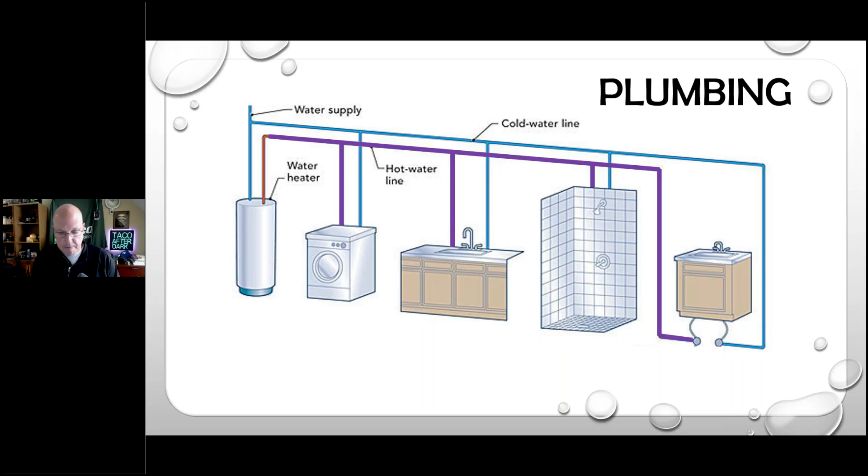So we lose that water. So now we have to dump all this water out of the line in order to get the water warm again at our fixtures. So that's our biggest problem: that water cooling down, and now we need to get that hot water again. And when we take a look at really what we're trying to do, I think this is so important to pay attention to when we start looking at the definition of what domestic hot water recirc systems are.

Now, I hate reading from slides, because I know everybody here that is joining online with us today can read. But I want to read it just so you can really pick up a few of the things that we're talking about today.

A hot water recirculation system is a plumbing system that replaces hot water to the fixtures without draining and wasting that water. Recirculating systems mechanically move temperature. Remember that, temperature from a water heater to the fixtures themselves. So it has absolutely nothing to do with the gallons per minute that your fixtures can actually flow. We are just looking to replace the hot water, the temperature that was in those pipes, with warm water from behind it again.

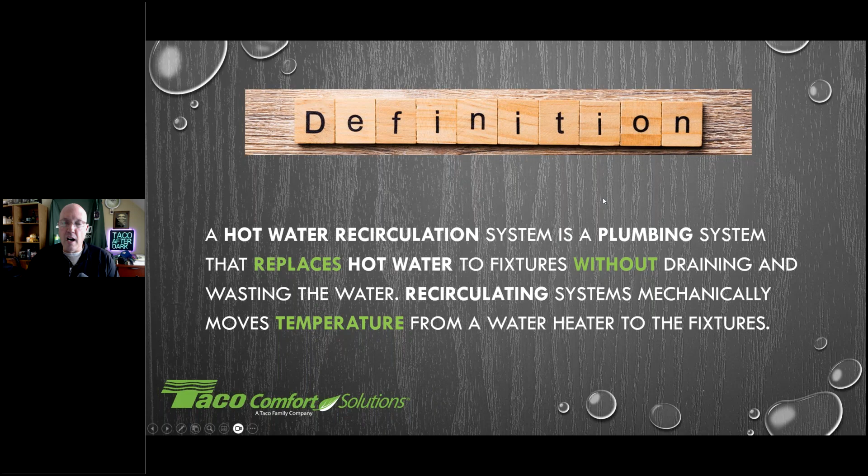So it's not going to be a very large flow rate. And that's going to come in really important in the next session when we go into sizing our circulators. So we'll spend a lot of time on that next week, making sure that we have the right size system installed for that application, for that project, for that house. So just remember that. It's not GPM, it's all about temperature that we're trying to move here.

So when we start thinking about hot water recirculation, many homes, many years ago, did not need a lot of hot water recirculation. But construction of homes has changed a lot over the last 50 years. When we take a look at what's changed, and why hot water recirc is more important today than it ever has been. And again, most people don't even know that there's a way to eliminate that wait for hot water. As we look at history over the last 50 years, the average home size has doubled.

You think about that home in 1970, a less than 1,500 square foot house. Today's homes are almost 3,000 square feet. And also think about how many people lived in that 1970s ranch. There were probably 5, 6 people in that house. There was no time for the water to ever cool down, because how many bathrooms were in there? There was one. So you end up with a lot more usage. The water never had a chance to cool down. Today's home, 2,800 square feet. And think about how many people are in that house today.

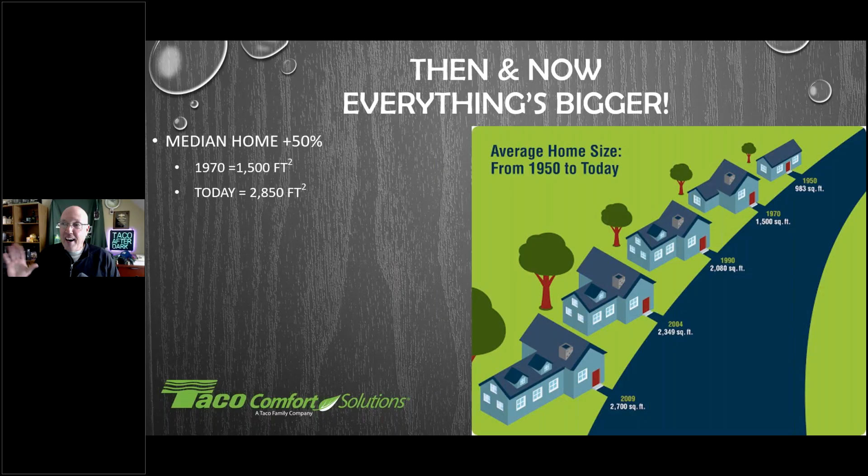All right, we end up seeing 3, maybe 4. All right, we're not going to have more kids than parents today. Okay, so the size of the home has changed. And therefore, with the size of the home that's changed, the distance to those furthest fixtures has also increased.

We're looking at that home maximum was like 30 feet. That ranch home that we saw in the 70s was a stack system. You had that water heater, and right above that water heater in the basement space was the kitchen. And the kitchen shared a wall with the 1 bathroom in the house. That was it. That was the amount of run-out pipe that you had.

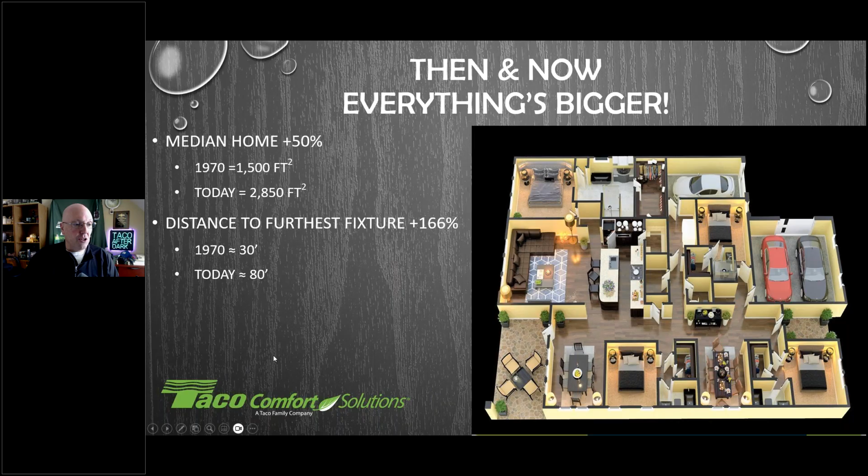Okay, now we're looking at 80, 90 feet to that furthest fixture. We're putting fixtures wherever we want to in this house. Nowadays we're looking to use hot water wherever we want to use it. And then of course, we also see the number of fixtures doubling out there. Every place we're putting it into a fixture group, we're doubling up those numbers.

For example, I renovated my house about 10 years ago, renovated to studs, new electric, new plumbing, new heat, new insulation, new everything. And as I was running that new outdoor spigot to the front yard, right by the driveway, mostly for washing cars and whatnot, I pulled out that spigot and I put in a hot cold valve for outside of the driveway, just for the capability of being able to wash my car in November and dunk my hand into warm water.

Now, granted, it was 10 years ago. I still haven't turned on the hot valve from inside the house to use hot water out in the front yard. Actually, I did. I had it on the first year. We had all this construction out there, and somebody decided to water the flowers that I had just planted and didn't realize they had turned on the hot side of the spigot, and everything was dead within minutes. So I did turn it off at that point, but I have that capability to have it there, right? So our number of fixtures have doubled.

So what does all that mean? Well, when you do the math, it's going to calculate out what we're doing and waiting for hot water. So the higher the fixture count, the more volume of water, which means we need to have bigger pipe to supply our house.

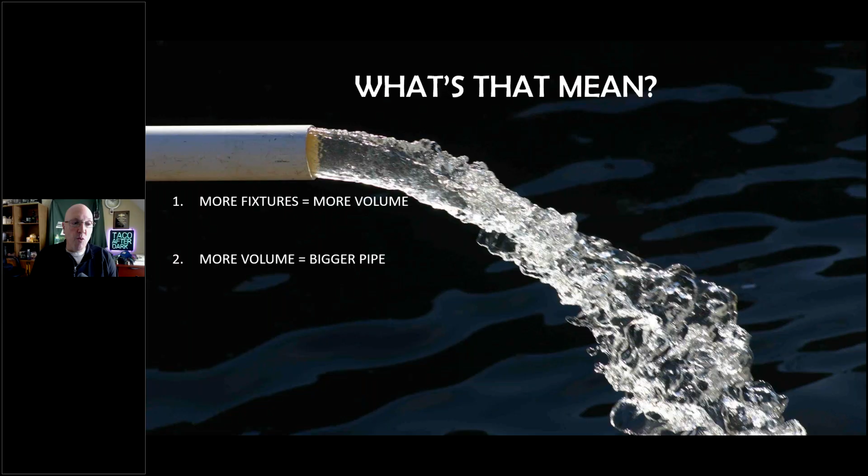You take a look at that old ranch house from 1970, we had 1/2 inch coming off of that water heater. Today, 3/4 and 1 inch is the norm coming off the water heater. And then as we do that tee and branch system throughout the house, we'll neck down to the smaller pipe size as we get further away. But that 3/4 and 1 inch is more common.

And then, with that bigger pipe, the fixture flow rates have dropped. We've had mandates come along with your fixtures; the flow rates coming out of your shower heads have changed. Look at the flow rate of a shower head today. You go put a new shower head in your house, you're looking at 2.5, 2.25 gallons, 2 gallons a minute. And even less is coming down the pike.

You take a look at that shower head from 1960, 1970. We're looking at 5, 6 gallons a minute. You turn the shower on, it took skin away. But now we have regulated fixtures dropping that flow rate down tremendously. So when that flow rate drops, the velocity of the water drops tremendously as well.

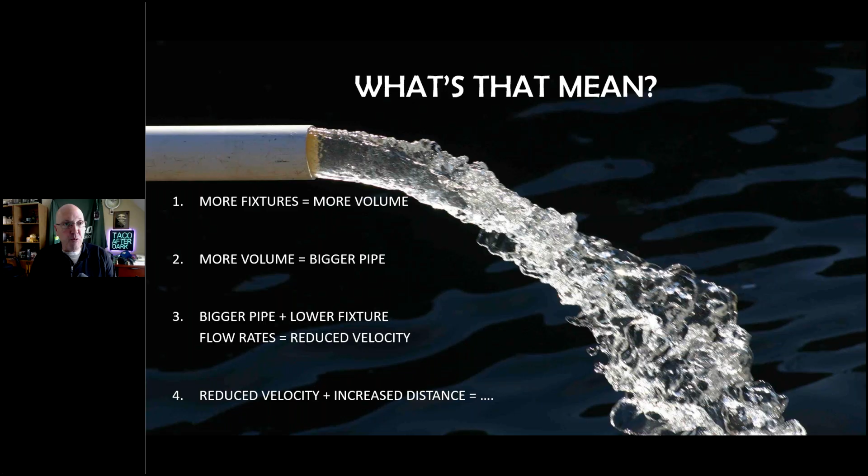So when you reduce the velocity and increase the distance out to that furthest fixture, when you do the math, people wait 18 times longer today for hot water than they did in 1970. 18 times longer. And what do they do about it? Absolutely nothing. It's just a given. Hey, this is what we have. For some people, it was a light switch moving from that 1,500 square foot ranch into a 3,000 square foot home.

And they say, well, the house is bigger. I have to wait for water longer, right? And that's it. They don't know there's anything that can be done. So waiting is one of the biggest downfalls to waiting for that hot water to get there. But then we start talking about the wasting.

All right. So if you wait for hot water, I got a quick question for everybody out there. If you can tell me, how long do you wait for hot water in the morning? How long do you wait? I'm just curious as to a general. We've got a ton of people online with us today. I would love to have a couple of answers out there on how long do you wait for hot water.

So Peter says he waits about 2 seconds. All right, so either he's got that 1970s ranch still, or he's got a recirc system installed in his house. You can always tell the quick ones. They got a recirc and they want you to know about it. Right. Tom here saying he waits 3 to 5 minutes. Yeah, Ahmad, 3 minutes roughly. Wow. Yeah. 5 minutes for Wanda.

That's crazy. All right. Now, what's interesting is that you're estimating that time period, but you'd have to stand there with a stopwatch and put your hand in the shower and wait for it. If you know you wait for hot water, what's your typical routine? You turn the water on and you go do something else. Right? And then you take a look back, and once you see the steam, you're like, okay, time I can jump in now.

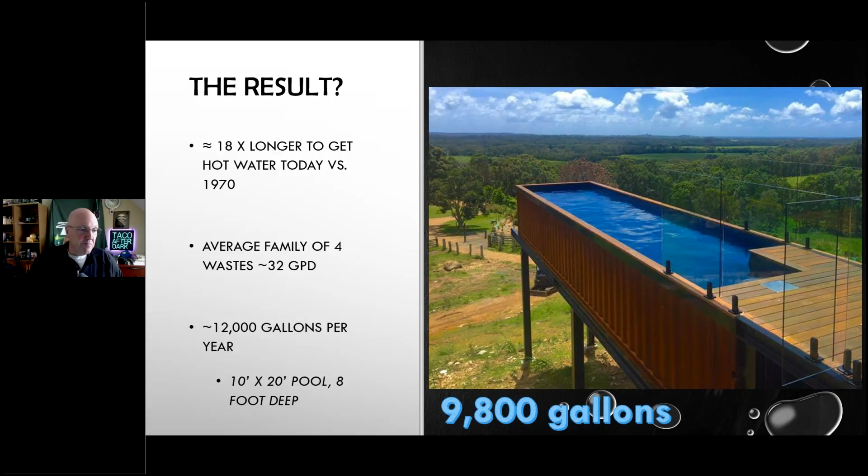However, we're on a septic system here, so I don't have to pay for it leaving my house. You travel 25 miles west of me and start getting closer to New York City and get into the 5 boroughs, well, you pay for water coming in once and you pay for it twice going out of your house. So then all of a sudden it starts to make a big deal. So anyways, just things to pay attention to.

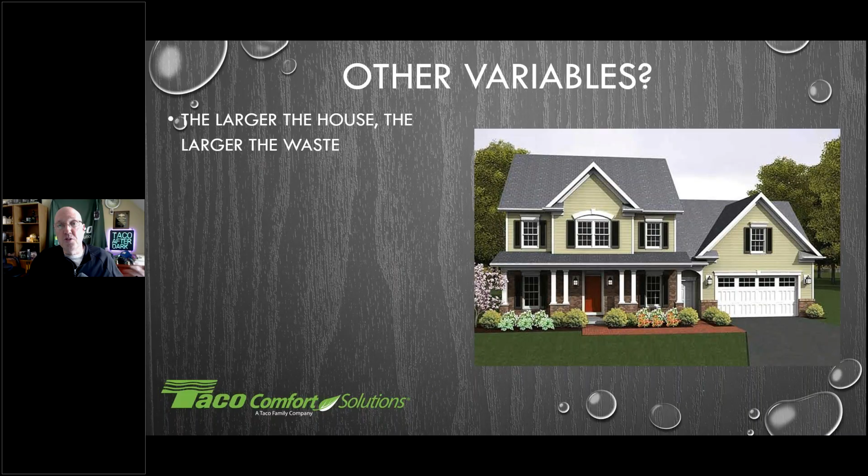Other variables that we're going to see out there when it comes to hot water recirculation and wasting that water. Obviously, the larger the house, the larger the waste is going to be. So you go from the smaller house to the much larger home here. But also think about your neighbors. Think about the immediate 10 houses around you. And if you all have the similar size home, all of a sudden we're looking at 120,000 gallons for your first 10 neighbors. That becomes an interesting number, right?

And now think about your neighborhood. Let's say your neighborhood's around 100 homes. 1.2 million gallons wasted while waiting for hot water. I don't know if we have any builders in here that are building neighborhoods. Well, this becomes a big deal to you on understanding where you have to put that water and how to get that water away from the home. Sometimes you might be able to build homes at a little closer density because you're eliminating the waste of 1.2 million gallons by adding a hot water recirc system to people's homes. So very interesting things to think about.

I've been seeing a whole bunch of things moving here on the screen. JB, do we have any questions or comments? Yeah, we got an interesting comment from Matthew Hermanson, who says he consulted with a fellow contractor in Southern California a while back. He installed a new tankless on a recirc system, lines underground to the master bath. It took 15 minutes for the hot water before the recirc. Now the electric bill went to $1,800 a month. He did the math. Everything was fine because they were busy heating the ground.

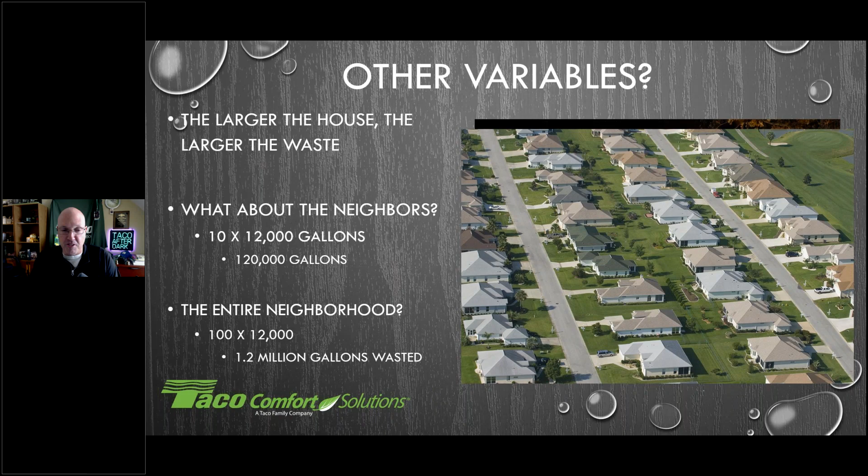You got a question immediately, you ask it. All right. And if it's really pertinent to the slide and the words that are coming out of my mouth, JB usually does interrupt me, and he enjoys that, well, sometimes. Thank you, John. And Rick. Rick's there too. Sorry. Rick's there. Jump in anytime, guys. All right.

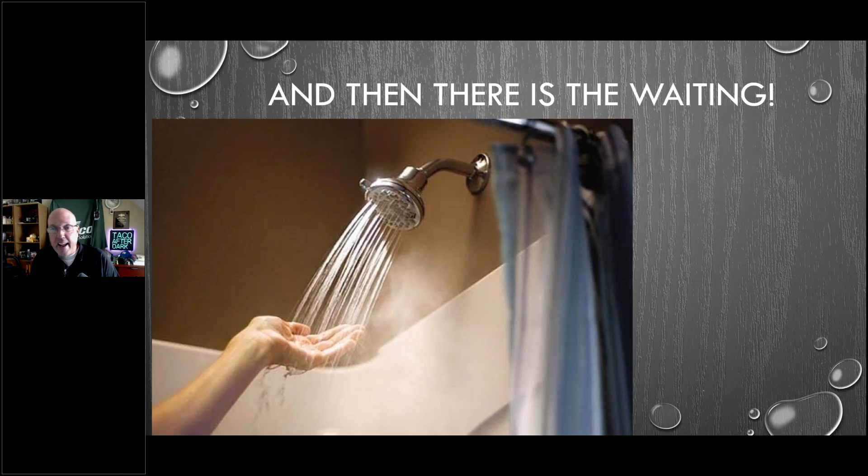But of course, then there's just the waiting part. There's the comfort and convenience behind waiting for hot water, and never having to wait for it. I mean, I know a lot of people in here, you travel, you spend any time in a hotel. Lots of hotels have recirc systems. It's always enjoyable to jump into that hotel and have instant hot water that's there if you end up having to wait for it at home. And then there's the hotels that do not have a recirc system.

And so I jump into those showers not paying attention because I'm used to it here at home, as well as some of the hotels on the road. But then there's other hotels where it scares the hell out of you in the mornings, right? You just suck up against that wall quickly. So, yes, there's the money side and the savings that you can see from installing a hot water recirc system. And then there's the comfort and convenience also of a hot water recirc system.

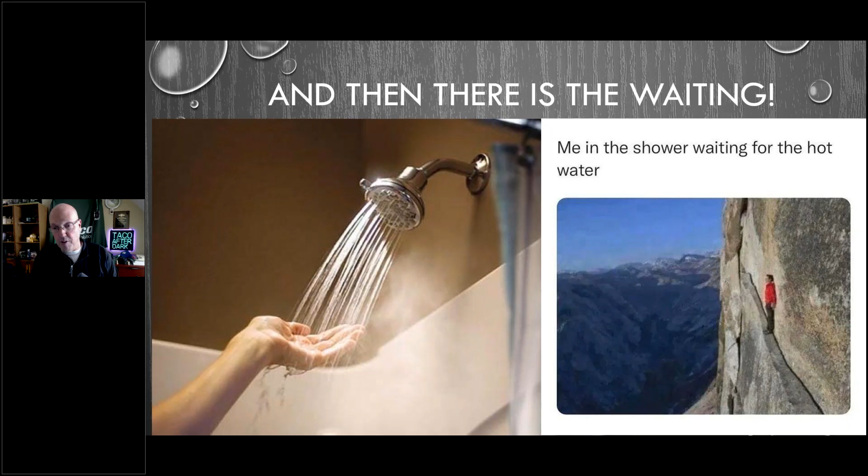I can't find too much of a negative behind hot water recirc systems, other than the few dollars that it does take to install. And that could be the only negative that's out there. There are lots of negative thoughts behind it, and people are always trying to discount it, saying it's like leaving a light bulb on in the basement all year round. Well, like we said, we're going to talk about controls next week, as well as doing the math. So it does not need to cost a lot of money to run a hot water recirc system, as well as making sure you got the right size pump and the power that it's going to take to use that thing.

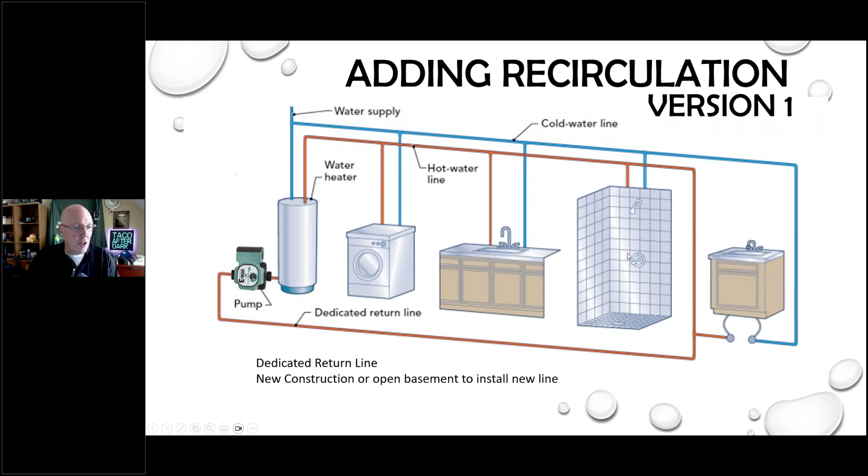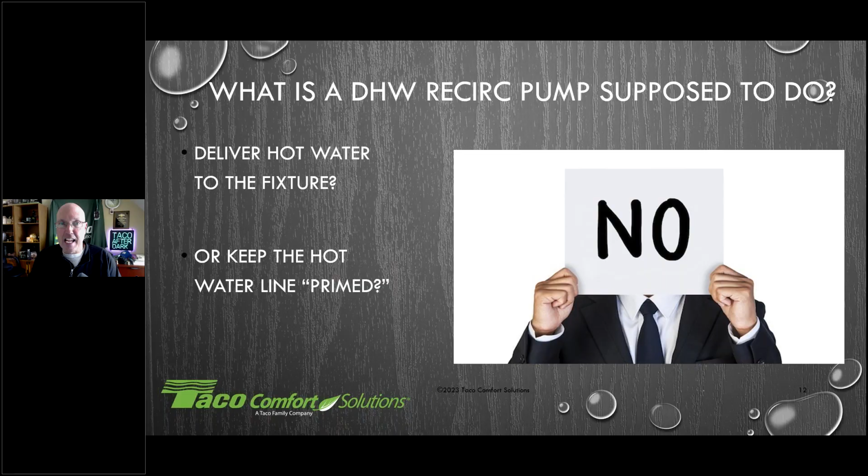All right. So as we move along, what is this recirc pump supposed to do? Is it supposed to deliver hot water to the fixtures? We'll see more details on this next week, but no, it's not. That's not the design of the circ pump. The circ pump is just there to help move some of that water, keep the pipes primed. We're just trying to keep those pipes primed. We're not looking to pump it out there.

The pressure coming in from the street or from the well is designed to keep the water in the pipes themselves. All we're doing is just moving that temperature around. We're just going to move that water temperature around. And that's where next week in sizing comes into play. We want to watch those maximum velocities out there.

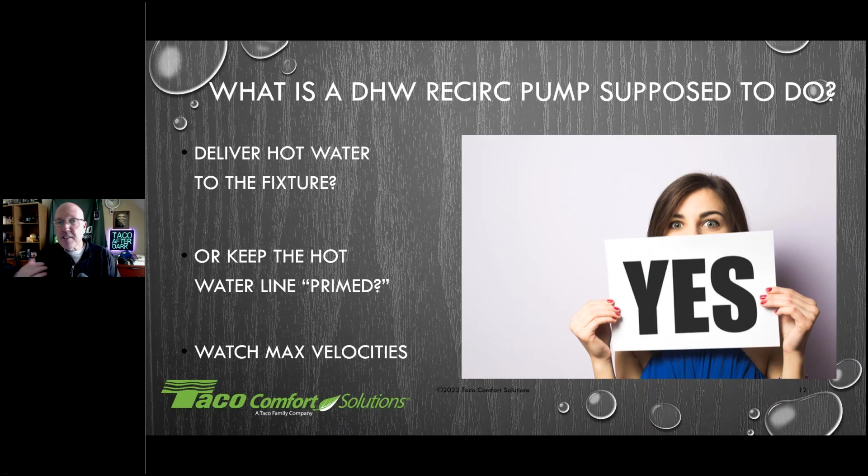Having a big pump installed in a system like this is actually really, really detrimental. Doesn't do anything for us whatsoever. So we want to make sure that we're not over pumping a system out there. So this is going to be in a residential setting and even some commercial and light commercial applications, really small circulators that are needed. So that's the best way I like to look at doing a hot water recirc system.

Version 2 is a little bit different. Version 2 is, again, looking at your trunk and branch system like this, but now there is no way we can run any return lines back to the water heater. The house is completely finished. It's a slab on grade home. Nothing has access to it. So let's just not even consider it and get rid of it altogether. Well, that's not what we need. You know, there are ways to add recirc to it.

And what we have is a crossover valve. So we'll have a valve that you can install at the furthest fixture, ideally, put a circulator on the hot water supply. And what we end up doing is using the cold water supply as a return back to the water heater. Now we're not putting hot water in the cold line. I want to make sure I get that straight out to everybody. We're not putting hot water in the cold.

The water temperature that's in our hot line has reached room temperature. It hasn't been used. The water's gone stagnant and it gave off its heat and it's room temperature, 70 degrees. Well, when we filled up the cold water lines, it was usually around 50, 55 degrees, maybe 60. Now that water has warmed up a little bit to room temperature. Okay, so all we're going to do is take room temperature water from the hot lines and move it across this valve to the room temperature water that's in the cold water line.

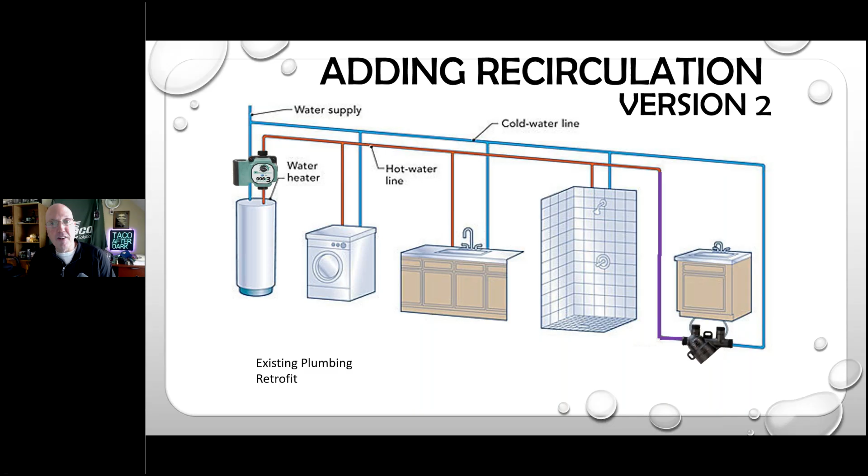The room temperature water that was in here is going to get dumped back into the water heater to get reheated back up again, and we're going to move it back out into the hot lines. So we're going from 70 to 120 in our hot lines, and then the cold lines, we're going to go from 70 to 70, and that's it. So that's how we can add hot water as a retrofit application, putting the circulator on the supply line here. Now here we're looking at really, really low flow rates, a non-electric device, and we call this our hot link bypass valve.

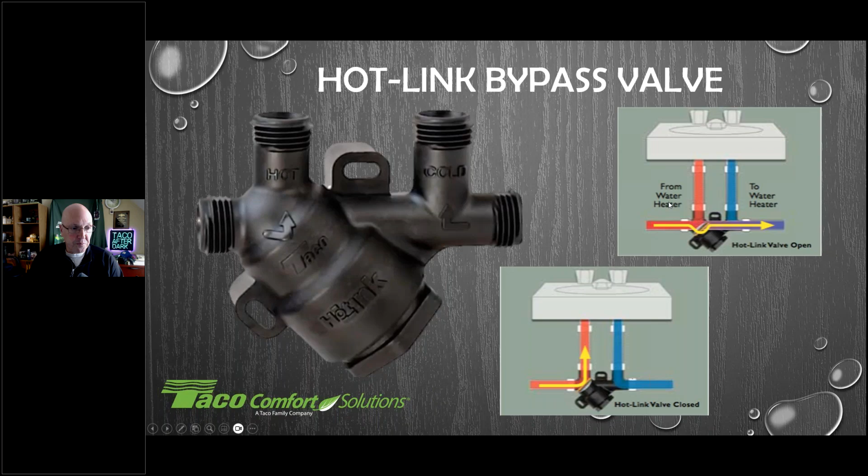And this valve is a non-electric device. What this valve does is it's got a snap disc technology built into it, and we have two pieces of stainless steel that are bonded together that are temperature sensitive. It's a snap disc, so when the water is cold on the hot side, like you see here in the top picture, the disc will snap down to allow some flow to go through. It's going to take that cold water, bring it through, and once the water gets warm the snap disc is going to snap up like you see in the bottom picture, and then stop that flow of water going across to the other side. So that's how this bypass valve is going to work.

So it has an internal sensor disc that's doing it, and you can see it right here on this cutaway. So this is the thermal disc. We do have a check valve built into the crossover valve, so this way you do not have your cold water side bleeding back through onto the hot side. So there's only a one-way valve that's going to happen here.

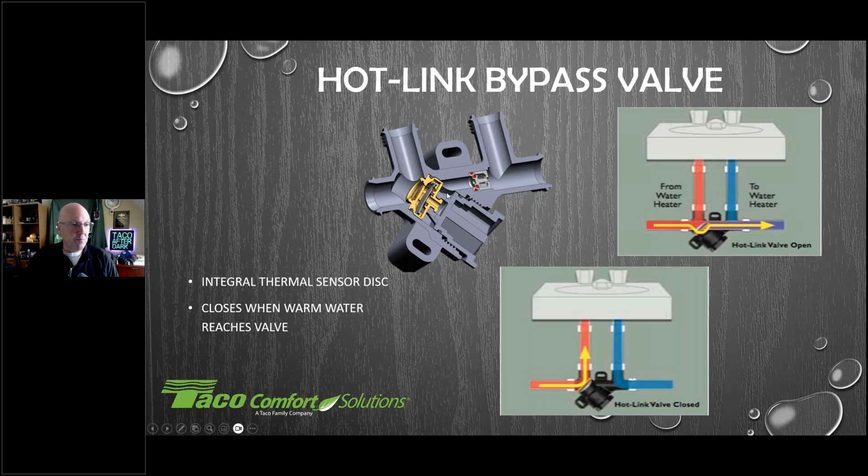And this is a simple addition. Basically, you've got your shutoff valves in the house that have your flex lines that come up to the fixture. We're going to disconnect from the valve and we're going to throw it onto the top of the valve here on our crossover valve. And then we're going to add new lines from the valves from the wall into the hot link valve. Hot on the left side, cold on the right-hand side. And this way it eliminates any of that water flow that we don't want to occur.

And since we all don't live in Maine, right next to Poland Spring, we made this as a cartridge design, so you can take it apart and clean it. It does have a screen across the top side of it here to catch any particulate, so it doesn't get stuck in the open position. And also, if you did need to, the whole thing is stainless steel, so you can use some cleaners on there to descale it if need be, or replace the cartridge if your water conditions are that hazardous to the device itself.

If you notice that you're getting warm water on the cold side, that means the disc didn't close. Things like that. So if you're getting some weird errant operations of it, then it might be time to change it. And I'd rather undo one thread than undo four. So leave the whole piece of plastic in place, the housing, and just change that cartridge in order to get that system back up and running again.

We got some comments here coming in, Dave, just some different questions. Yes, sir. There was one that came up about using the cold water line. Is Legionella a concern in that cold water line if that water heats up? But as you said, we're shutting the valve off long before the warm water gets into the cold water line. And generally speaking, in a residential application, we're using water pretty much all the time anyway. Rick, what are the temperatures at which Legionella really starts to become an issue? Because if we're talking about 70, 75 degree water in the cold water line anyway, that should not be a problem in terms of Legionella.

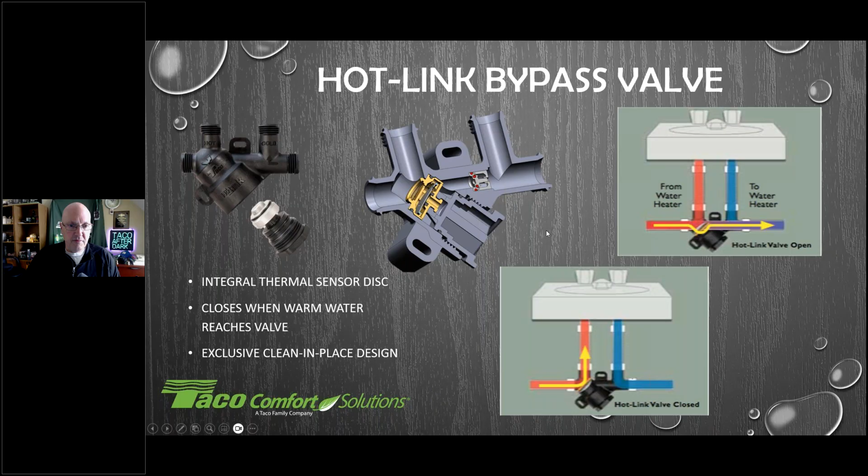So what about tankless? Right now, I've talked about everything being on a tank style design. Well, the hot link valve, that crossover valve, is not designed for tankless. It is designed for a tank style water heater. If you were to put it on tankless, the challenge is that the valve is only allowing about 0.33 gallons a minute through it. It doesn't allow a very high flow rate.

And I don't care what size circulator you put on there. The problem is that most tankless water heaters are looking for about a half a gallon a minute across that heat exchanger in order to fire. If you give it a little bit of flow, like through that hot link valve, the water heater may turn on and say, oh, never mind. Oh, never mind. And you get this sandwiching in the pipe itself, so all of a sudden you feel hot and cold coming out of the fixtures.

So you don't really want to use your crossovers for your tankless units unless you have either a tankless unit that can fire on a low flow rate, less than a half a gallon a minute, or a crossover valve that goes over a half a gallon a minute. And I don't think there's anything out there that does that just yet.

Now if you were to use the dedicated return line, you can go tank or tankless, and we'll show you the sizing for that. With the crossover valve, we're looking at a tank style water heater, whether it's an indirect tank or a standalone fired water heater. Okay. But now let's talk about tankless and how we can do recirc.

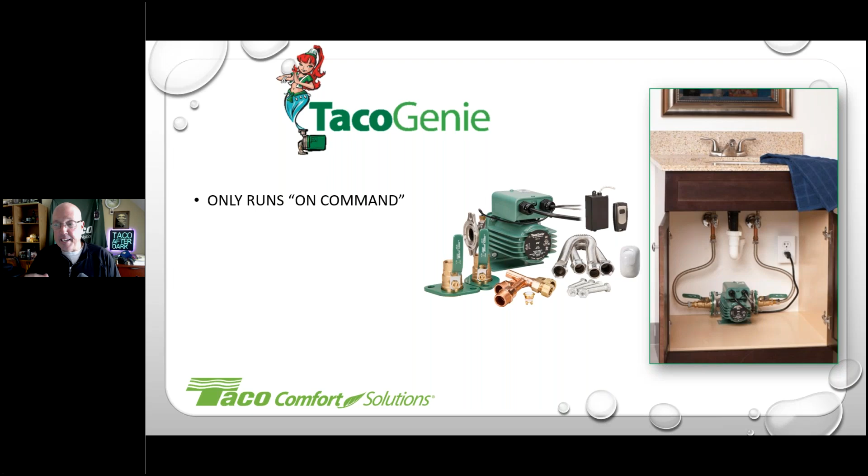And it's activated by a couple of ways. If you're walking into the bathroom, there's going to be a high assumption that you're going to want hot water right about now. So the way it turns on is either by a push button that we can install near the sink itself, or by a motion sensor, which means you walk into the room and it's going to turn on. And then the pump will turn on.

Now, this system, as John was saying before, is our greenest system that we have, as in it uses the least amount of electricity, because the design of this circulator is to run for between 15 and 45 seconds. That's it. It does not run a very long time. It is a much larger circulator because with our tankless units, we want to have that high flow rate. But here, we are looking to do some fast and furious pumping and get the water up to the fixture as fast as possible and then shut off.

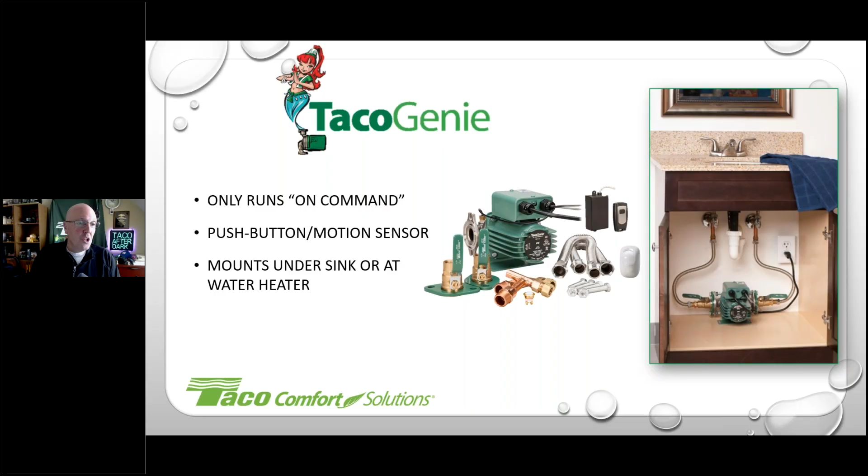So we're going to mount this underneath the sink. As you can see here, it could be done back at the water heater as a dedicated return line as well, and we can use the Genie controls in order to do that. But the most common that we see is using it in the crossover function, where we're using the cold water supply as the return going back. And like I said, we can use these with our tankless units because we are looking at much larger circulators like our 008s and 0011s, depending upon the size of water heater that you're using.

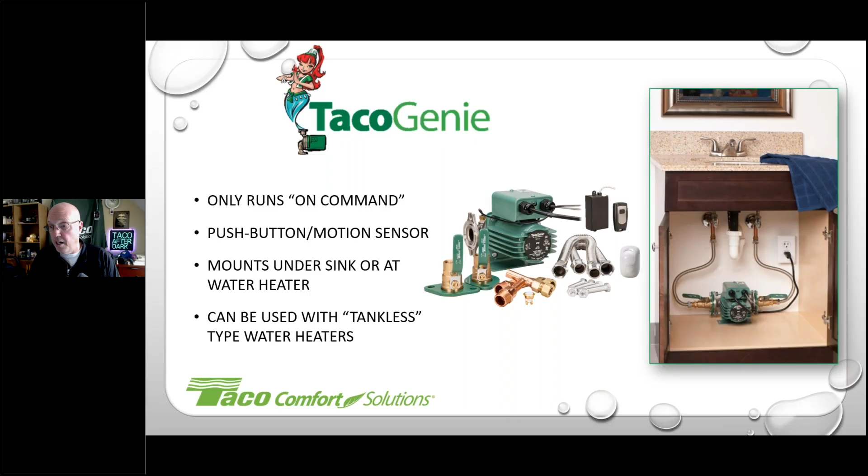So when that motion sensor or the button gets clicked on, the first thing the circulator does is look at the temperature right here at the supply of the circulator. And if it's below 99 degrees, it's going to record it and say, okay, here is my starting point. If nobody has used any water in this house, as we know, we're going to see 70 degrees on the hot and 70 degrees on the cold. Let's say it is 70 degrees when it kicks in, because I want to make sure the math is nice and easy for everybody.

What this is doing is looking for an 8-degree rise, and then it's going to shut off. So if it was 70 degrees when this pump was activated, it is now looking for an 8-degree rise, which means it's going to shut off when it sees 78 degrees at the supply side of the circulator. When it's 78 degrees, what's behind the 78 degrees? Yes, the 120 or whatever your water heater is doing is going to be immediately right behind it. Shut the pump off. Don't make that pump run any longer. We've got the hot water right there at the faucet.

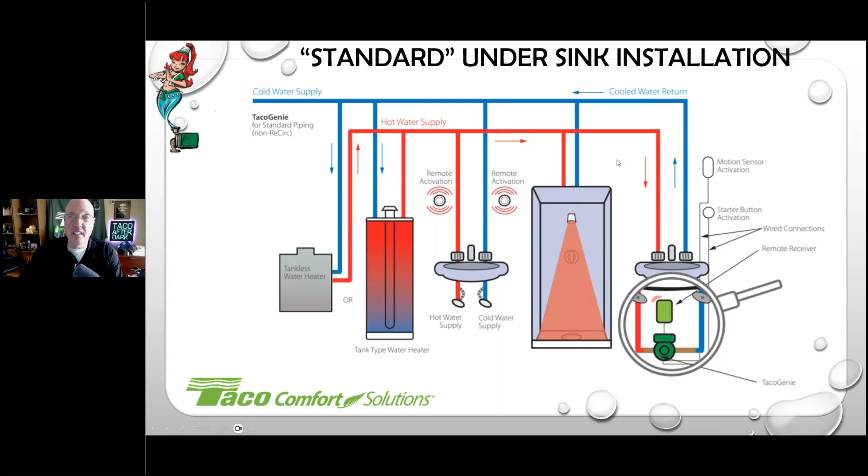I did finish within the hour. Holy crow. Very nicely done. Very nicely done. I finished under the hour, JB, too. That's a shocker right there for you. It doesn't usually happen. I don't know. You say I'm long-winded. I know.